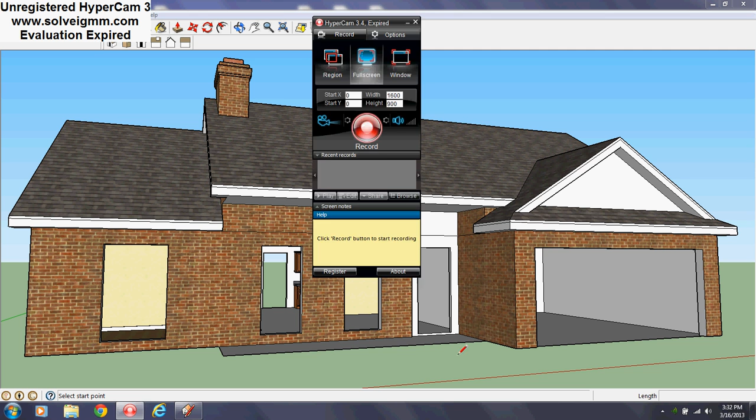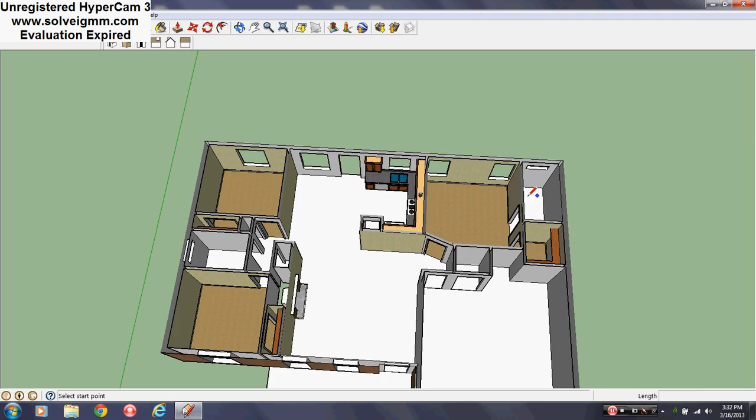Alright, let's get started by taking this roof off. As you can see, last time I did these bedrooms, but today I'm gonna actually go and do the bathrooms, so this one and this one - regular and master. Now, one thing to note about these bathrooms: they're very simple, usually with a single configuration: a bathtub, a toilet, and a vanity sink. So I'm going to do it that way.

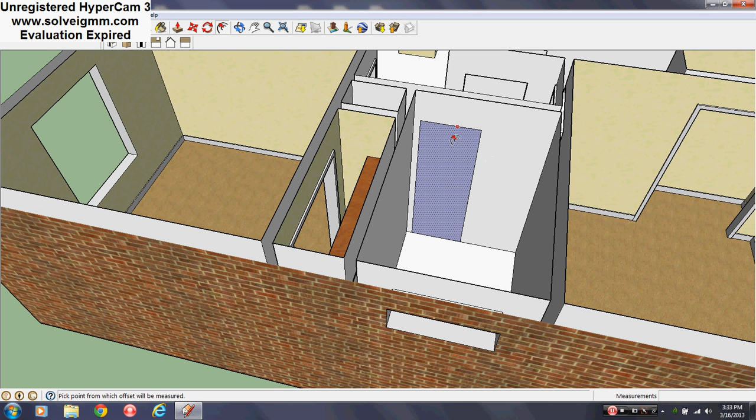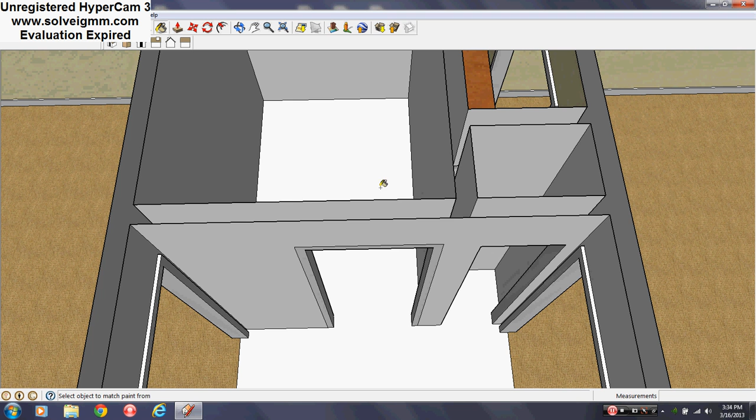Now, as basic as it may feel, some people, you gotta know how to do basic things before you can get on to the bigger things. What you gotta do is start out small and end up big. You learn to walk before you can learn to run. When you know the basics of how to make these appliances and stuff, you can use that to make bigger bathrooms or other things. And this house is pretty basic - that's what the tutorial was anyway. It's not like it's a big fancy mansion.

So what I'm doing now is I'm just putting the doorways in. That's the very first thing I do before I start any room, is I usually do the door first. So right here I'm going to put a bathtub.

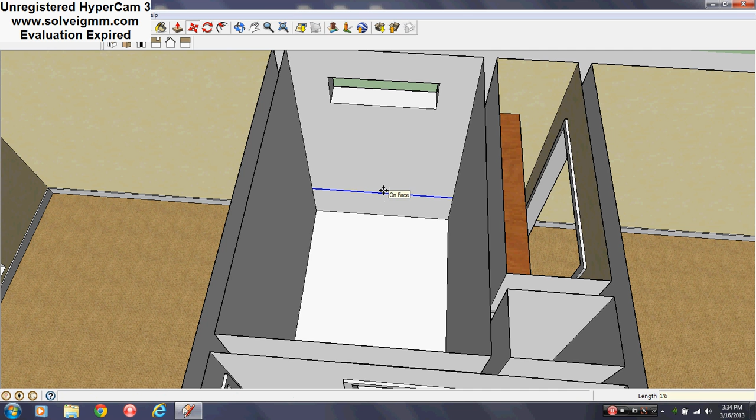Just take that, use the move tool up here - Control, then I'll go up a foot, 1'6". You can also look in my lower right hand side of the screen, you can see the dimensions. And I color it. And the push pull - usually I just go out 2'6", standard. 2'6" by 5 is standard.

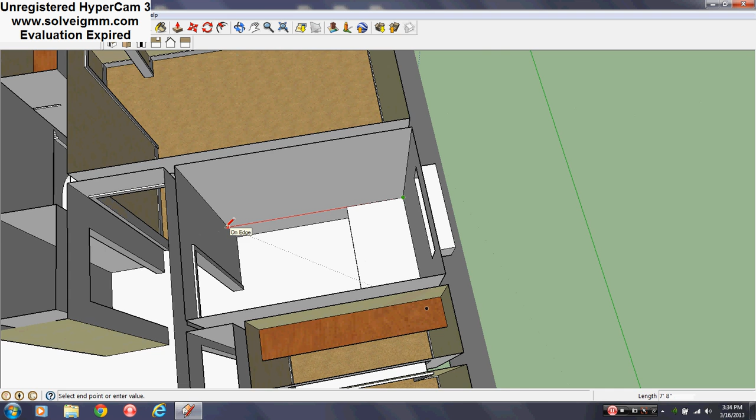And yet, it's just a basic bathroom. So then what I'll do is I'll make one offset for the hole in the tub, and another offset for the walls of the tub, because obviously you want a backsplash for the shower and everything - you don't want to get it directly on the drywall.

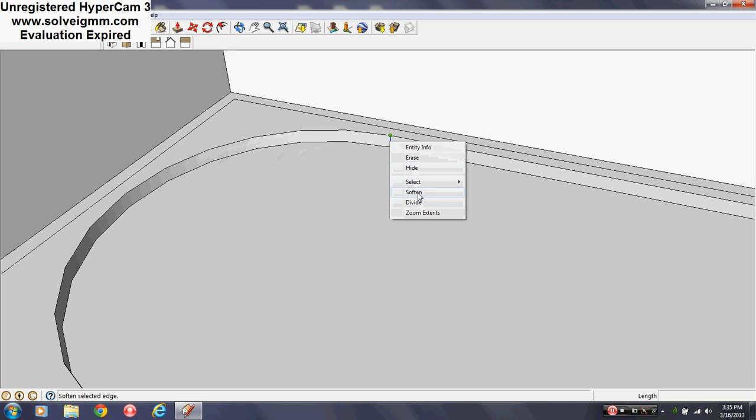Now I usually make the curve on the plumbing side - other people don't, and I only do that for modeling's sake. I bring this down 1'1" and I just make an arc. Again, whenever I make these things, it's just for the model's sake. It's not like you can download real stuff, but this is how you keep everything low polygon, and that's how I'm able to put in more complex models.

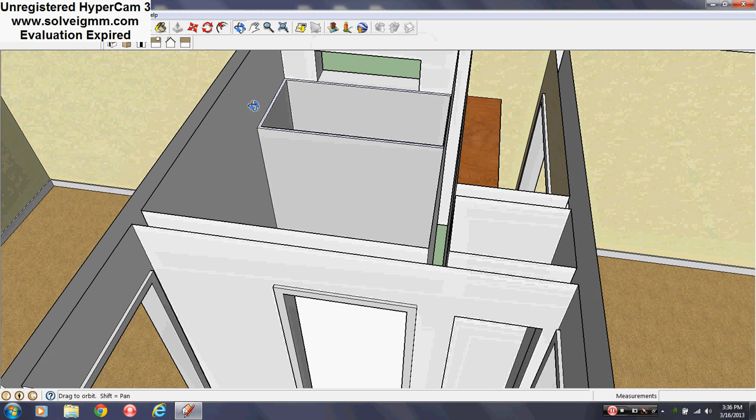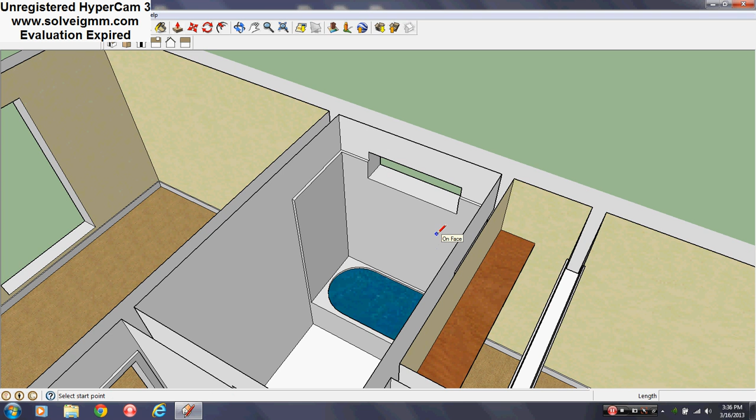I usually like to bring it up to door height, so there. As you can see, some of the window has been covered, but I will fix that - I'll just go back here and push it out, and when the time comes I will go in and fix that. Usually I don't have a window in my bathroom, but I'm trying something new. But I have done this before where there is a window, and I'll just fix it accordingly.

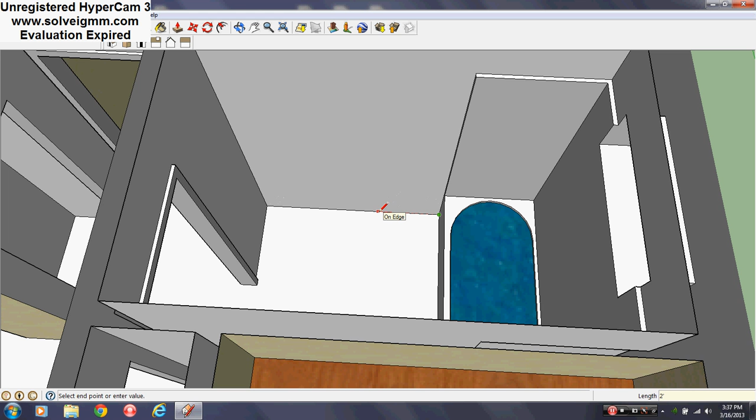Alright, so now that there is the bathtub, let's make that vanity. Before we do that, let's determine that we have to have at least 2 feet of space here so we can put the toilet - at least 2 feet. So this is like 5 feet, so then we'll have like 2'6" to be on the safe side, and so then we can still have 2'8" for the vanity. Again, this is very simple.

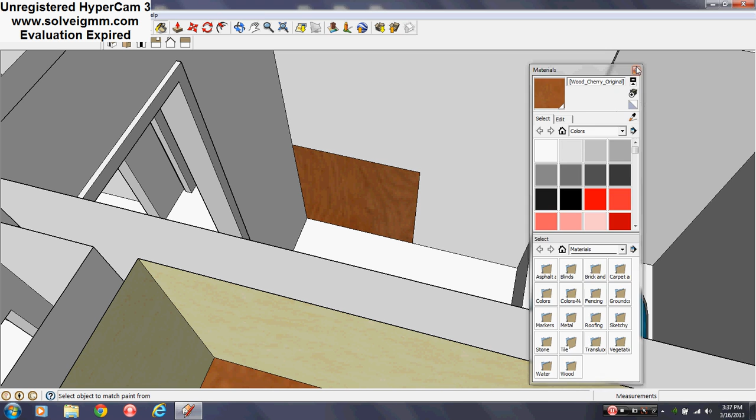I work very, very simply, because people have been asking me how on earth can I make these grand models that are less than 10 megabytes in the warehouse, and this is my answer right here. Everything is done very simple - I mean, all accurate to scale and everything, but just simple. You don't see any faucets, you don't see any heads, or any of that stuff. So what I did was I colored the floor because I'm going to make the baseboards.

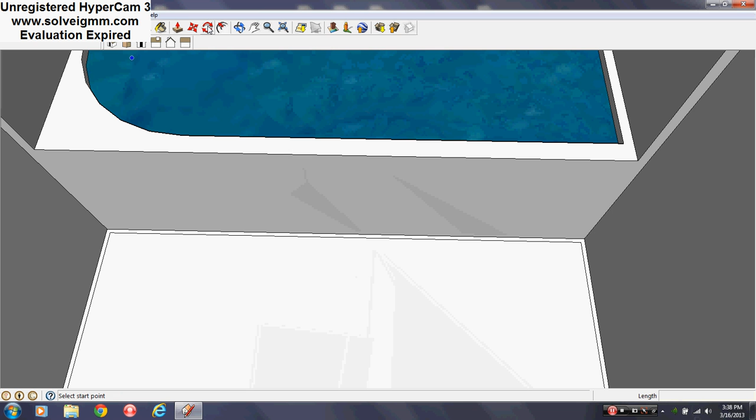Or as people like to call it, kick molding. Gee, I wonder why people call it that, right? I mean, it's by your feet, so then, whatever.

And then, like in any other videos, this isn't any different from any of my other videos in terms of how to do it.

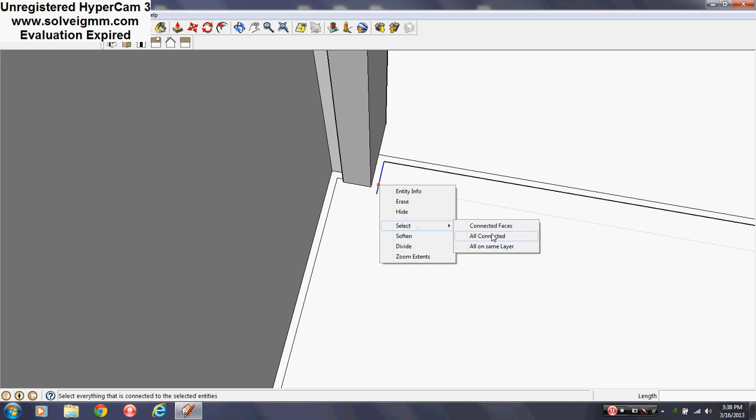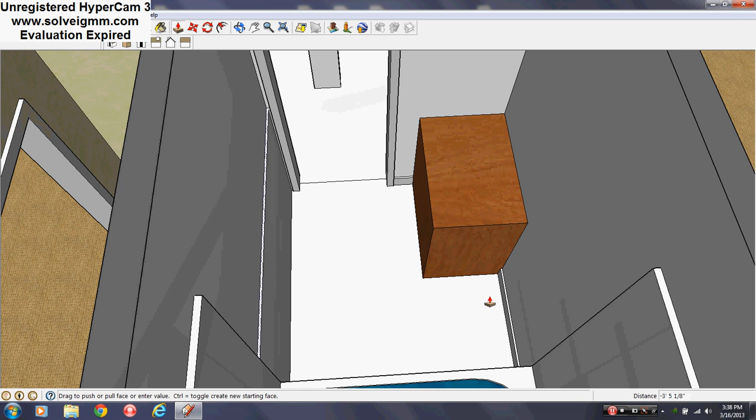And I just bring it up. If I don't remember the height of these, I just hover over them and it will give me that height automatically. Cool, right? Okay, so now that's done. Put some tile on the floor.

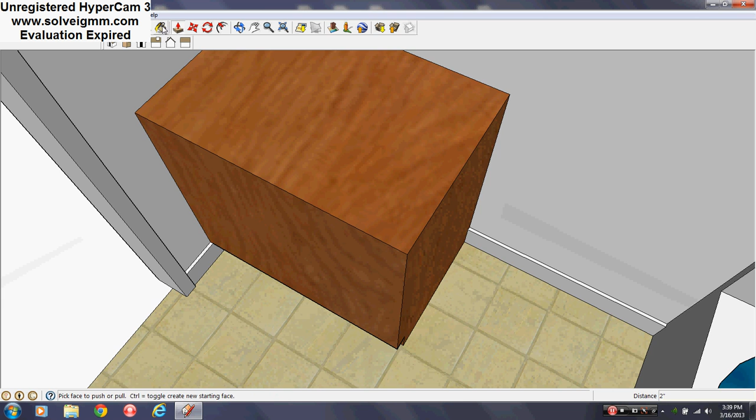Then we'll make the little shoe at the end here, like how a real vanity is, real countertops. Why do I keep saying vanity? I'll use some material - my usual favorite is going into stone and making this kind of marbly look to it. You can choose whatever you like though.

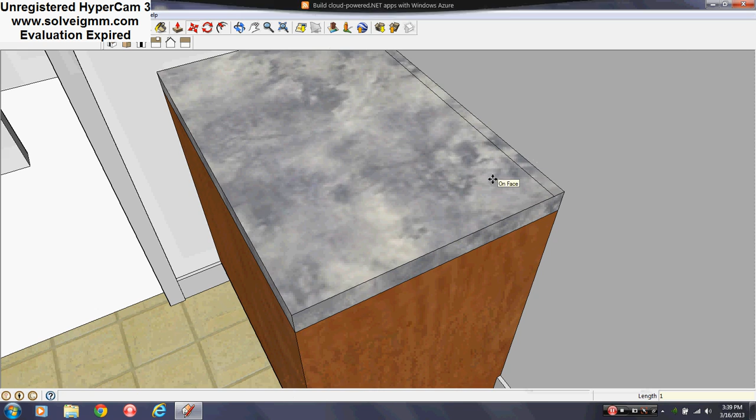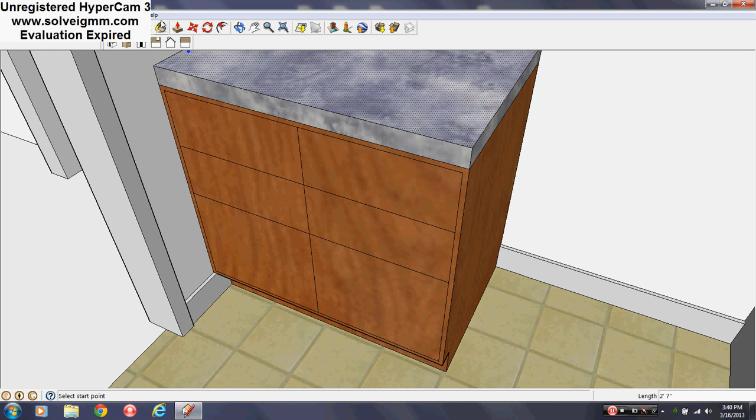Now I'm going to actually decorate. Something like that. Bring this out a little bit.

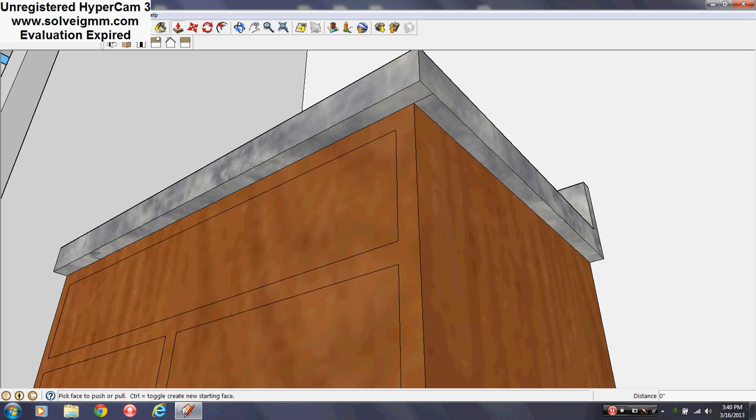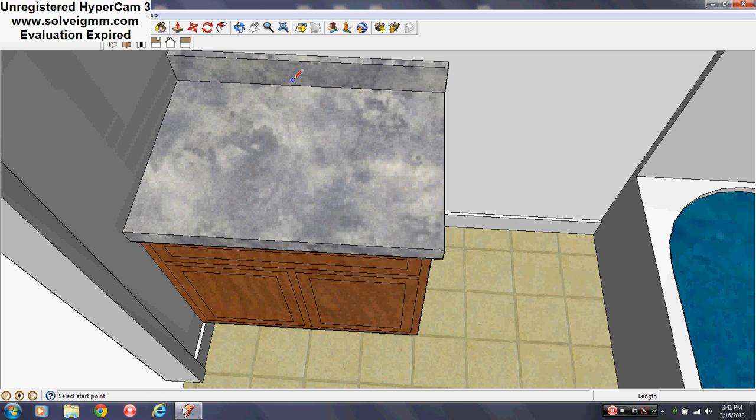Now the height of this, from this top here to the floor here, is 2'9", and I bumped it out 1'10", using some standard units whenever, because I mean I know a lot about houses. I've seen a lot of houses.

Well, at least enough to know some basic dimensions of houses. Then as you can see, this is very basic, this sink here. All I did was just make a hole, a circle in the middle, and extruded it.

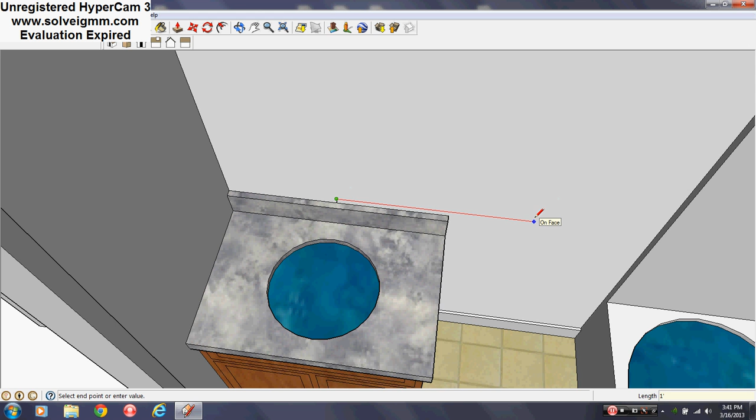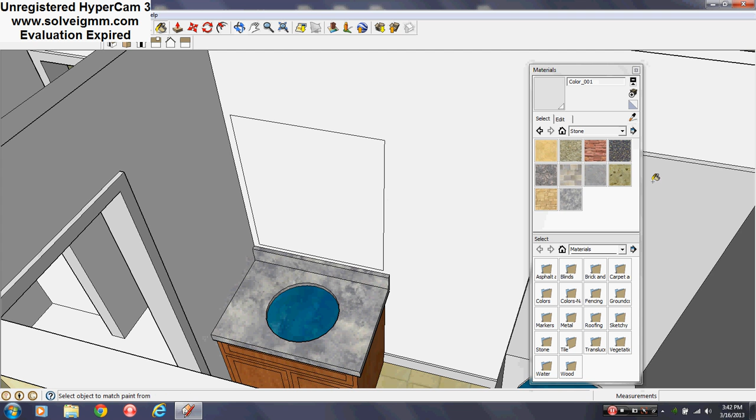Now, people have asked me what the primary purpose is for just making this blue instead of making the bowl. Number one, the bowl takes too much time, and also it's more space, and it doesn't matter when you view it from above, because I look at these at floor plan view sometimes. So what you see are just these like water shapes, and it's pretty much inevitable that you know that's a bathtub, that's a sink, and I just use water and stuff.

Then I color the wall, as you can see. Go ahead and color that too.

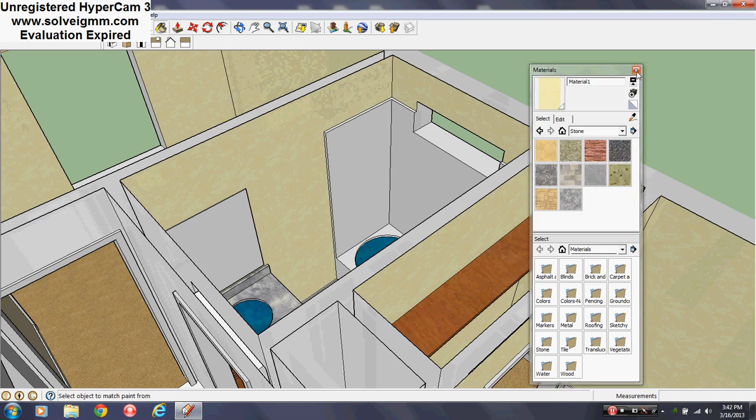And when I come out here, make a little line, because you notice how it's like, plenty of space for a toilet now. I'll just make this line in the middle to 0.5 inches.

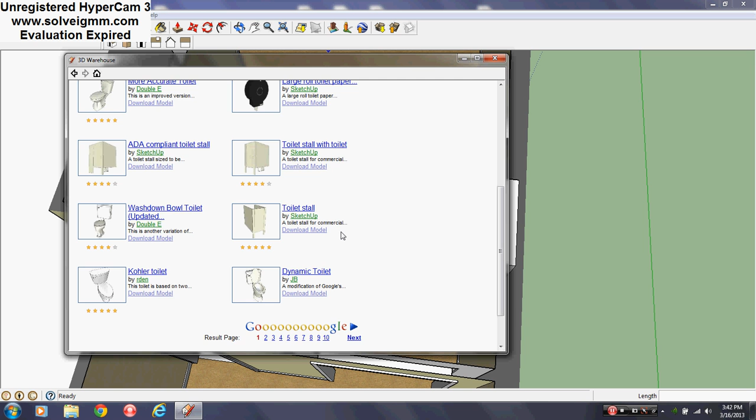And then actually, because I am so super lazy, I go to the warehouse and type in Google toilet. It gives you a whole bunch of toilets. And then you see toilet 2, right? This toilet 2 actually I find is the best in terms of simple modeling. I mean, it's an accurately done toilet. Props to Google for that.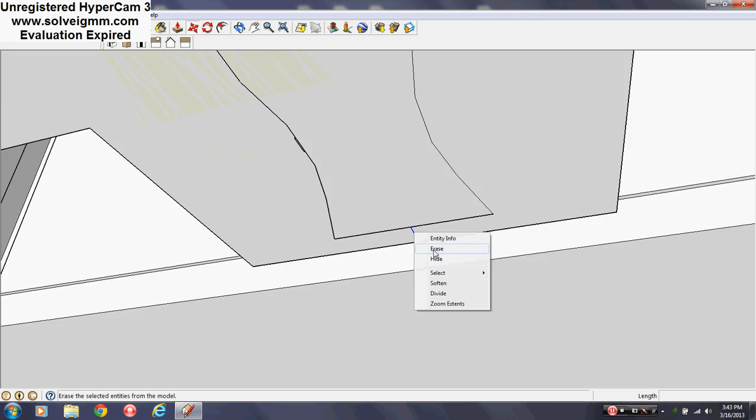And it is actually simple enough that I can just put it in my model, and it won't really do anything to it. But what I like to do is I go in and clean it up because it has some rough edges. I don't know, I'm one of those people who just, if I can't have it perfect, I get annoyed. I don't know why - it's part of the reason also why some of you see why I edit so many of my models every now and then, is because I find imperfections and they bother me. So I go and fix them. Darn it.

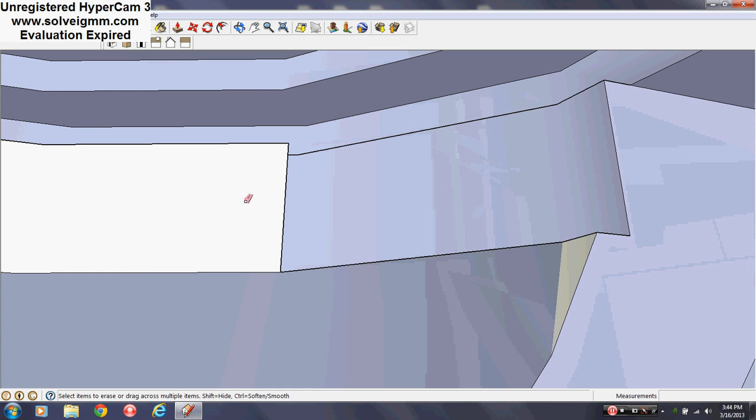Sometimes that will happen and you just have to undo - Control Z, simple 2 keys. They've been my best friend. Because whenever we were kids, we were using Kid Pix, I would always have to go up and go to undo. In case you don't know what Kid Pix is, there's this 90s program I used - it's like a drawing and paint program.

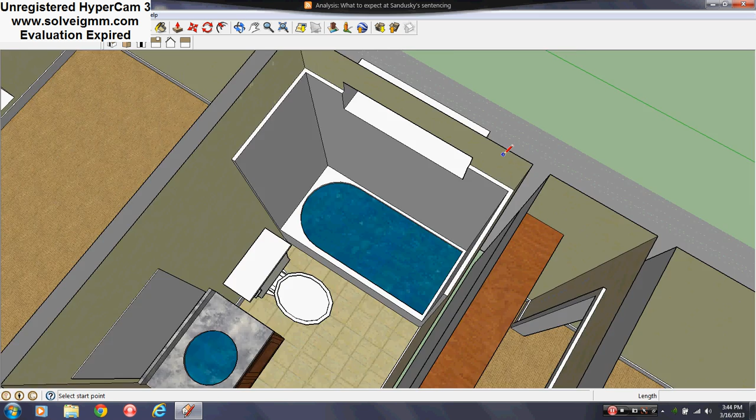So what I did is I just exploded the toilet. You don't have to do this, but I just do anyway, depending on the complexity of the model at hand. They're not a bad bathroom. Right here, it's for modeling's sake - in real life it'd be done a little differently.

I just put this window here. And then also, like I said about perfection, I go in and clean it up.

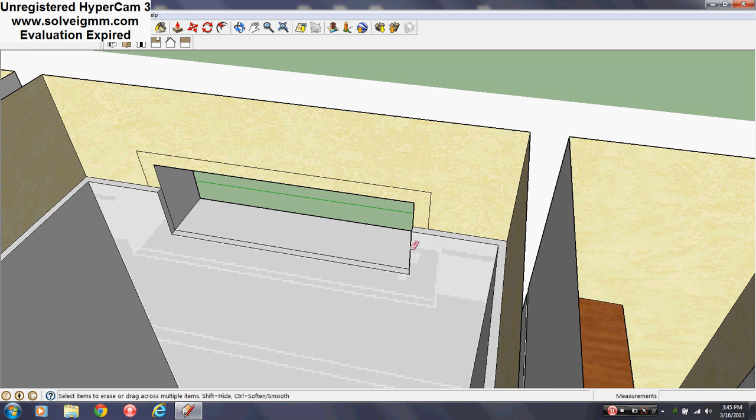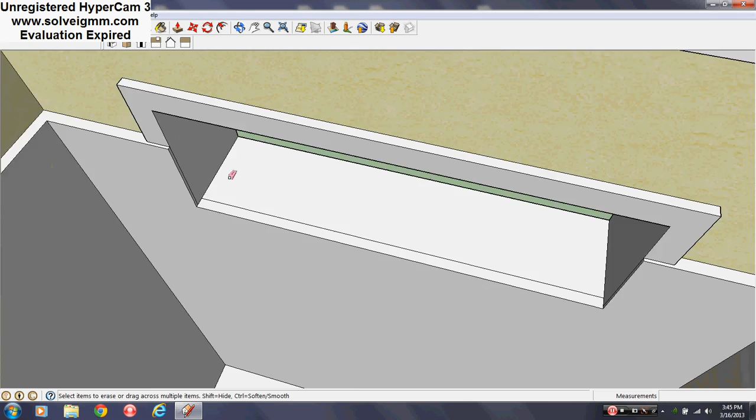And then whenever I get to the windows, I'll finish that. But right now, I'll just extrude this out just a bit. Might put like a glass block, 3 glass blocks in it or something. I'll think about it when I work on that.

Now as for this, it's pretty much the same thing. Let me see if they're the same size, because if that's so, I can just copy and paste. Now this one's a little bigger.

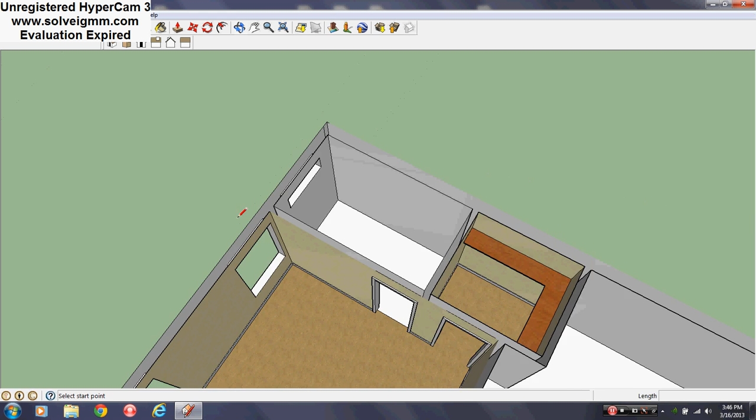So, you already know how I did the toilets and all, so I'm just going to fly through this real quick. Or you can just watch.

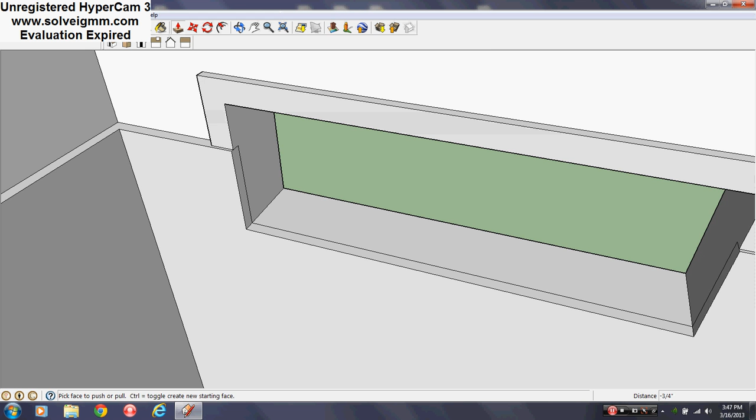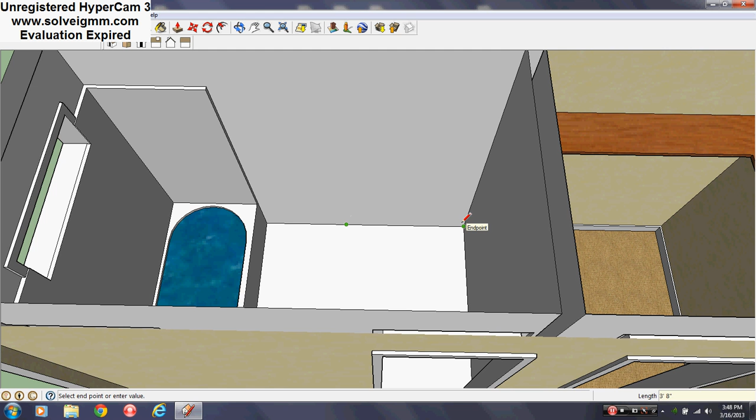Okay, now this is going to be a little bigger, so it's going to look a little bit different. Not much different. Okay, let's go up some. 3'8".

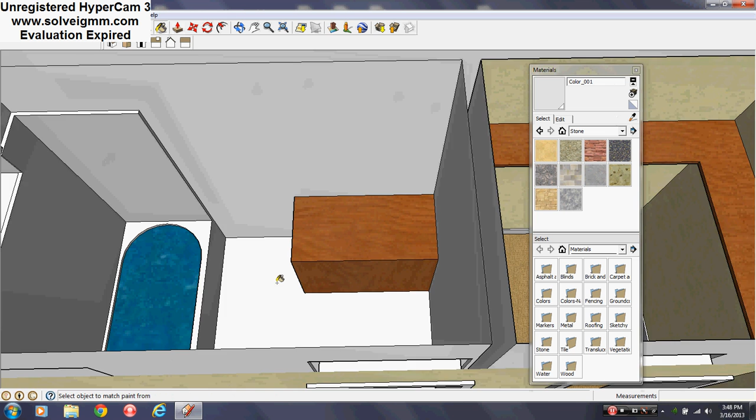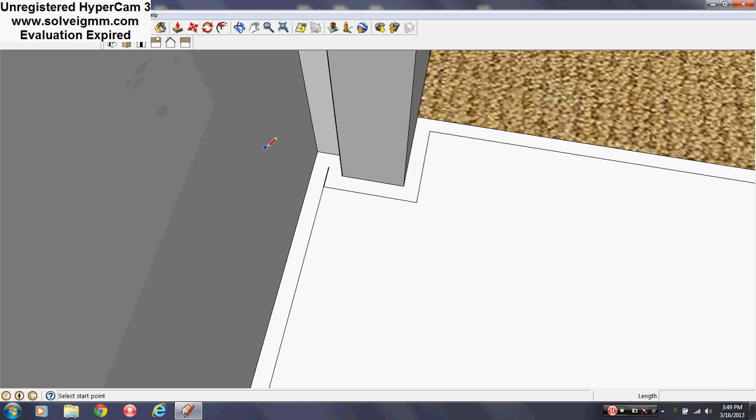And then the baseboards are the same principle. Now, the reason why I'm actually doing the bathroom again is just so you can see it without having to rewind the video. Or if you get it, you know what I mean. It's up to you if you don't want to watch the rest of it.

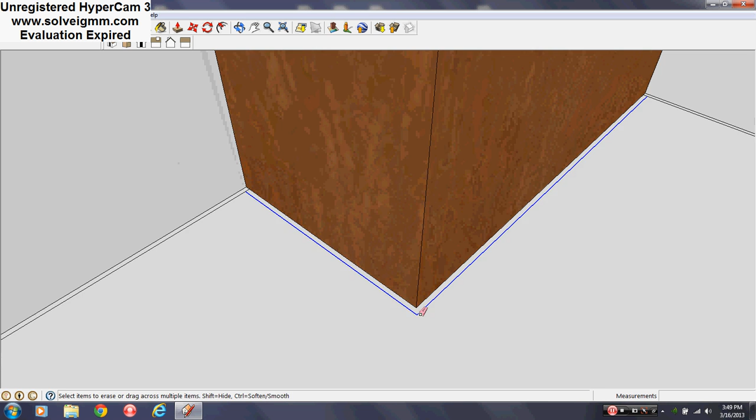So we'll just be finishing this bathroom. And again, as simple as this bathroom is, it just shows you that you can learn how to use some of these components and make better, bigger, fancier bathrooms.

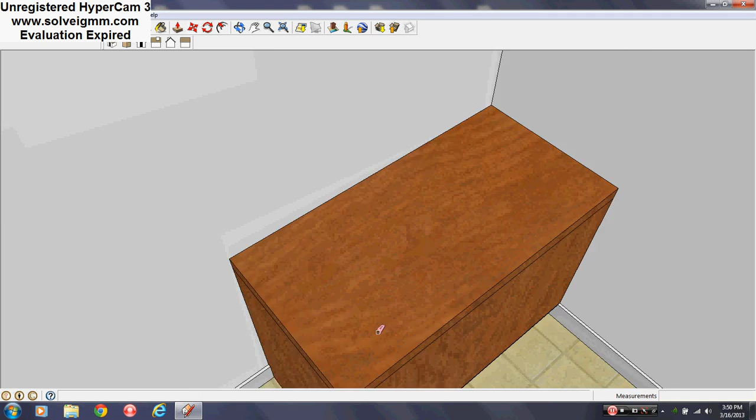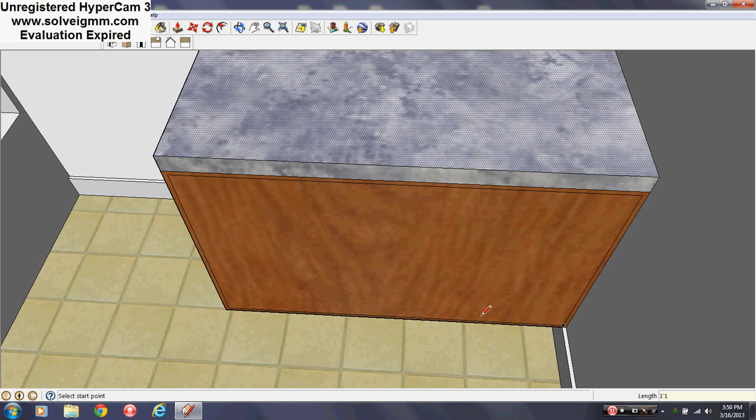Now, these drawers, there's gonna be drawers here. Sorry, I cannot talk today.

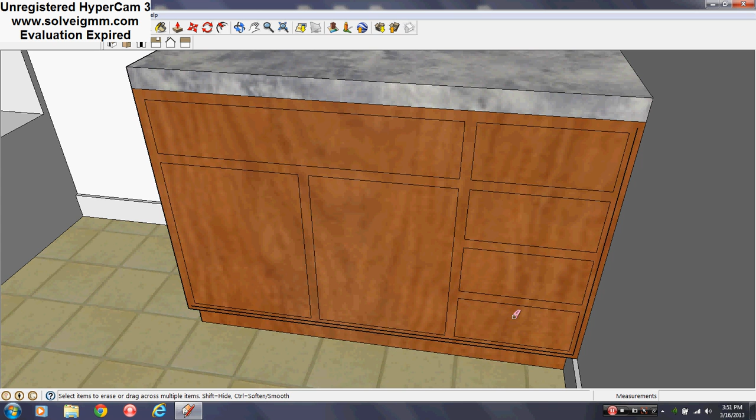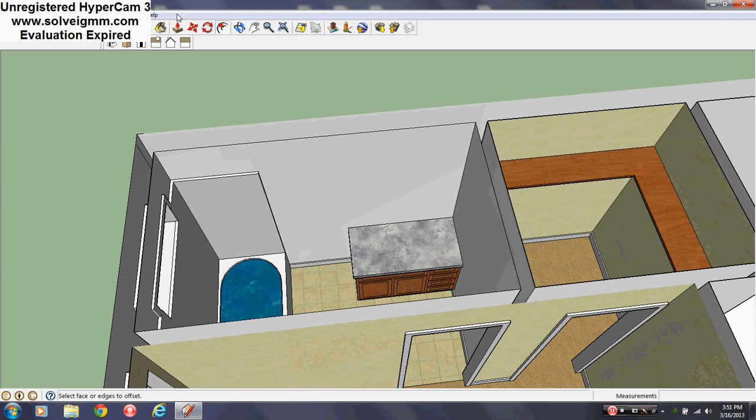And again, you see how simple it all is. You see I'm not including handles, and I'm not including faucets, all these nice little nitty-gritties.

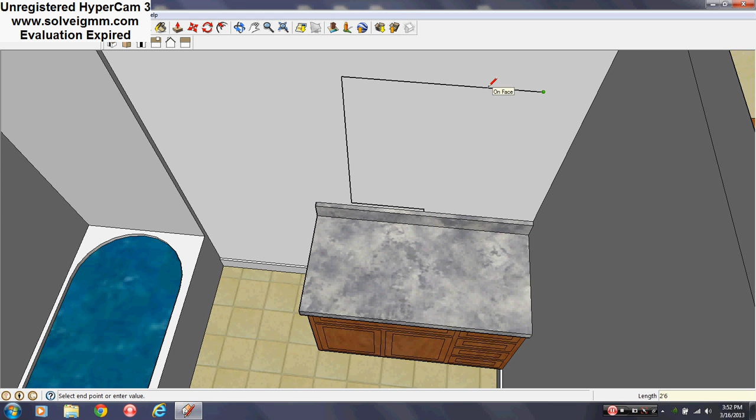So, because sometimes even at this point, other people's computers are slowing down and they don't know why. This is why. Now, high quality components are a good thing. Like when you want to put a high class, classy rendering of something, it'd be great to have it for the time being, or when you're just doing that one room. But doing a whole house, you're gonna have some trouble, and I personally guarantee it.

And if you want to upload the components to the warehouse, it depends. You might have a little friction.

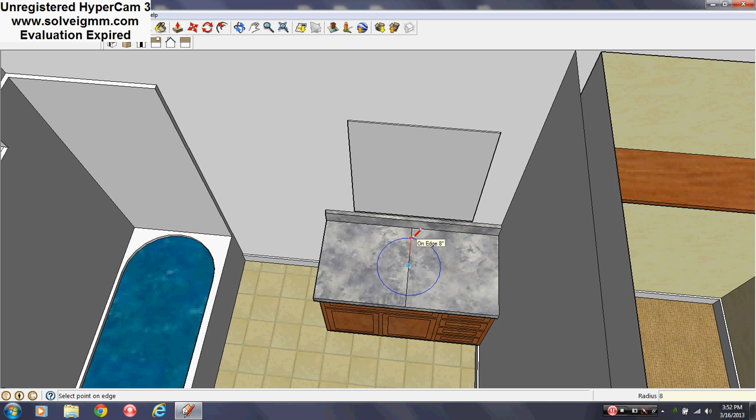Oh, in case you're wondering about the placement, it's just in the middle because when I look at it from plan view, it doesn't really matter. Besides, it's just SketchUp, so.

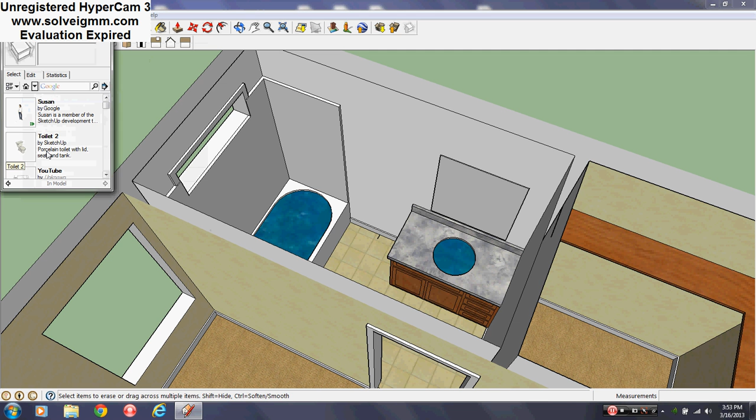Now when I want to regain something from a previous component load, I just go to Window, Components, down to In Model. As you can see, there it is, so I don't have to reload it.

Just turn it. And you take it from the center and then just drag it. Erase the line. There you go.

And also whenever you go back to Window, Components, In Model, you will see, as you can see, it's my cleaned up modified toilet. Because if I re-download it, I'll have to clean it up again. I don't want to have to do that. As you can see, perfection.

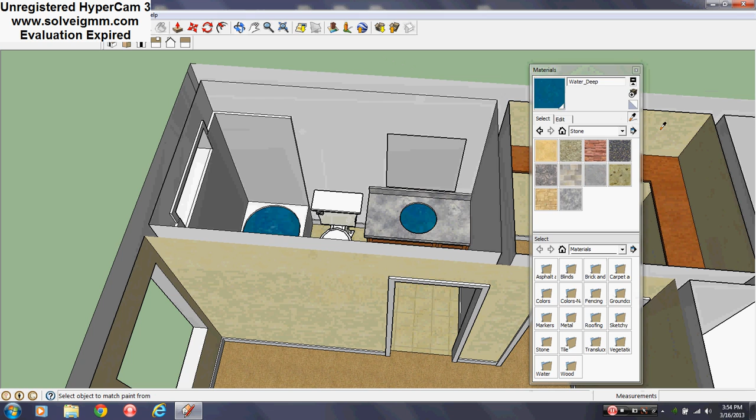And this pretty much sums this video up. It's just how you do basic bathrooms, basic components, how to keep your file size small. I mean, always avoid unneeded stuff if you can. You see, that was relatively quick, too, so.